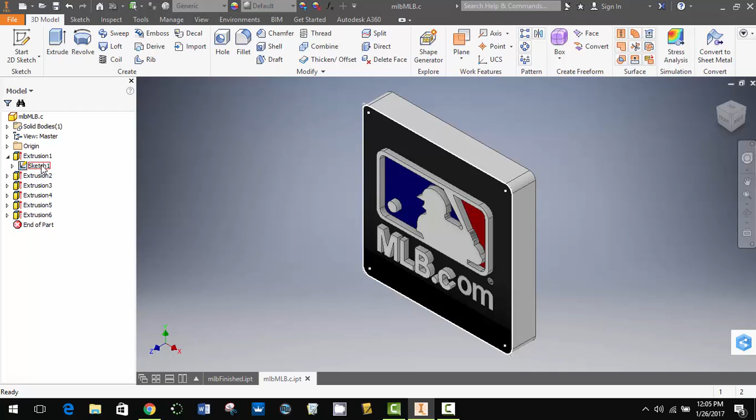I've got my finished product open right here, and I've got this one open too. I've extruded this area and a few of the letters. I wanted to take you back to this idea of having the 2D image on there. You can see that dark gray area with the red and blue right there—that's simply because this sketch is still visible. That very first thing I put down when we started this project was my picture, my 2D image, and I made it visible, then I'm going to take that visibility off.

So I right click on that first sketch that's hidden under extrusion 1, turn the visibility off, and we can see it's starting to really take shape. I'm going to turn it back on real quick because I still have to do those last 2 letters.

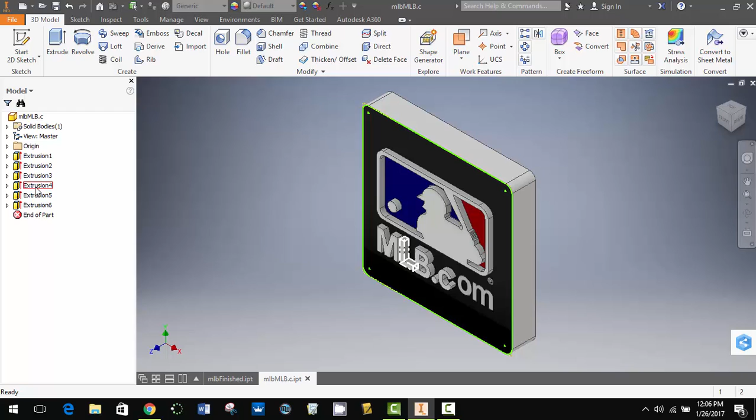I'm also going to show you what you can do with your extrusions. All my extrusions are going direction 2, so they're joins that pop up from the surface. If we look at it from the side, you can see them standing up. We can also make them cuts if we wanted to. If I double left click on extrusion 2, I can change it from something that builds on the surface to something that actually cuts into the surface.

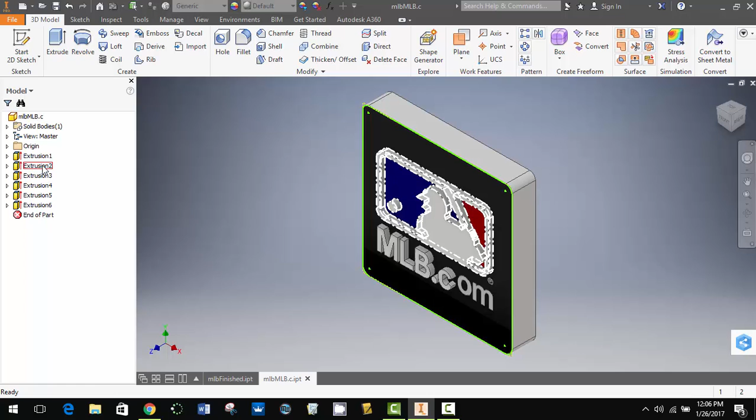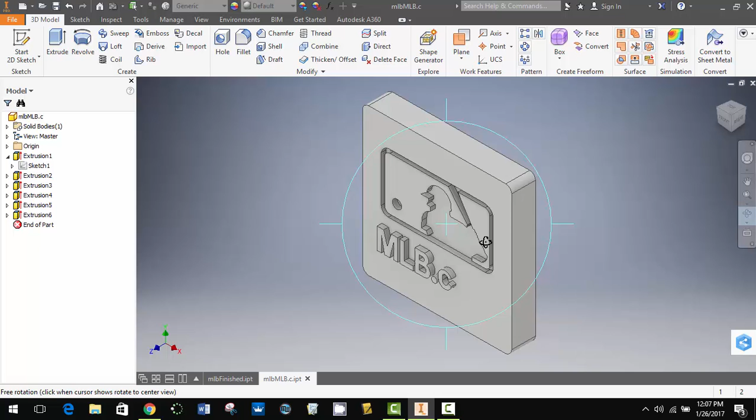So I'm going to double click on it and change it to a cut. I might have to switch the direction also. Let's see how that looks. I'll turn the visibility off on my sketch, and we can see that it now cuts into that block instead of building on top of it. I think that's an okay look—it would probably 3D print quite nicely.

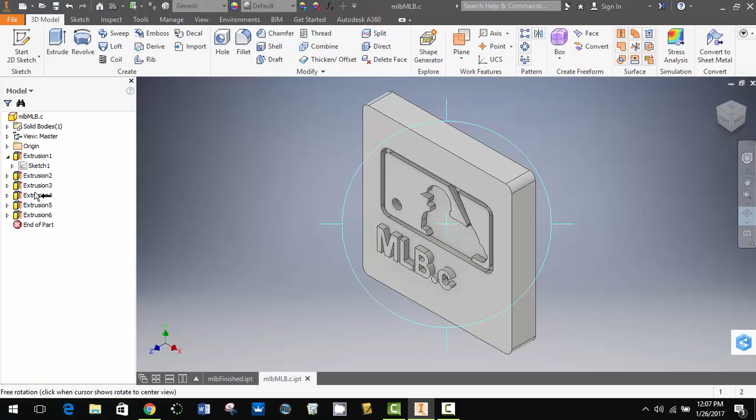Maybe I'll leave it like that for now, since I've already got one finished that does the opposite. I'll leave that one like that and see how we like it once we get to the end. So I'll click on my home button. I need to turn this visibility back on, so I right click, check visibility, and now I'm going to start a 2D sketch. Click on this flat surface right here.

I'm going to trace those last 2 letters. It might not be that exciting to watch me trace these, but I figured I should give you a little bit more of a tutorial on how to do that. I'm going to start off with the arc for this O and for the M over there.

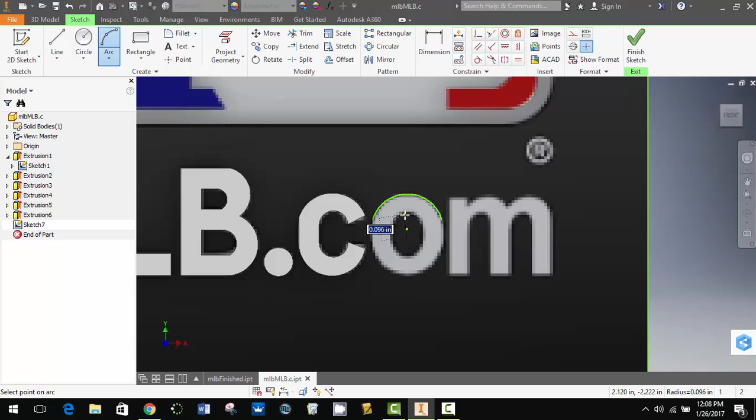I'm going to draw a line across here and bend it up, and that'll give me the top of the O. Then we'll do the inside of the O—just drawing a straight line using that arc tool, 2 left clicks, and zoom in a little bit. Get that line there, come down here and do the bottom. Left click, go across to the other side. I'm lining it up with the top, if you see that dotted line there.

I'm going to left click and stretch it out. Left click, do the middle one, line it up with my top one. Go straight across, line it up with the top one, and stretch it out.

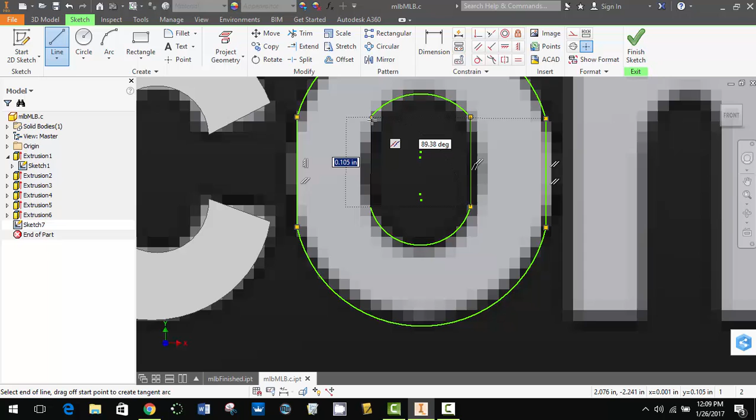Now I can connect those arcs with straight lines. Left click, come over here, left click—make sure you get the green dot, that's showing you it's connected, so hopefully we don't have to do a lot of cleanup. Hopefully it'll just extrude as soon as we're done. So there's my O—if I zoom out, it looks pretty good. Let's see if it works.

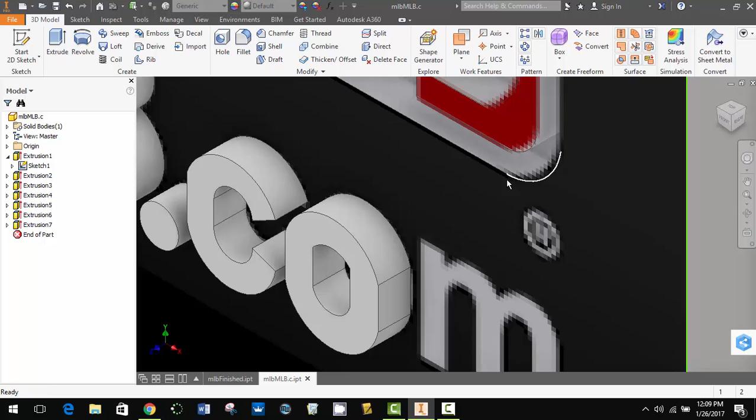Finish sketch, click on extrude, and zoom in pretty tight here. That is a lovely O. Use my wheel to zoom out, press down on it to use it as a button to move it around, and we'll do this M real quick because it's a little trickier. I just want to give you a few more tips.

So I just go straight across that curved area and click, come over here, click, click, drag it up, click, and I'm going to do the same thing with these. Just take it straight across, and hopefully drag it so it matches that shape pretty well.

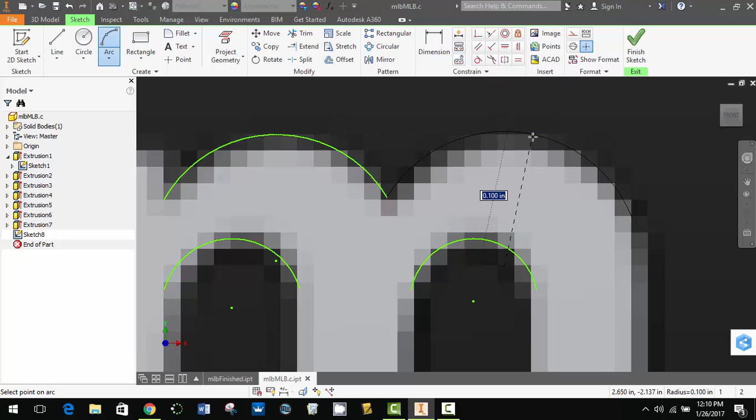I'll connect these last two—might put that one at a slight angle. See how that does? That looks pretty sharp. Connect everything with my straight lines, getting that green dot, take it up.

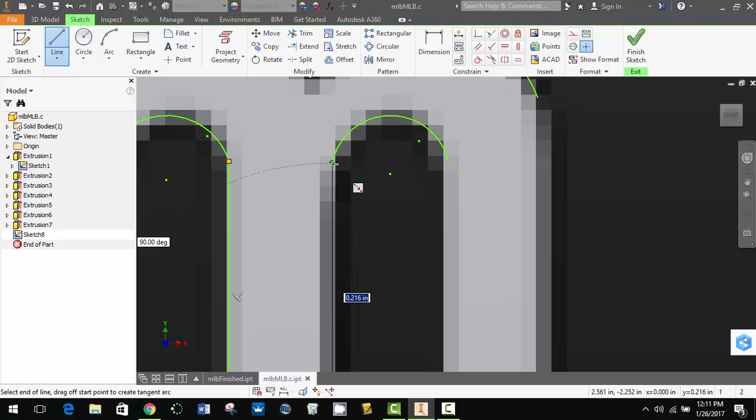Move it over, down, over, connect it to that arc—not the straightest line there, but that's okay. And we'll click on there, bring it down, over. It's just a lot of left clicking and making sure you're getting that green dot so your lines are connected, so you don't have to do a lot of troubleshooting at the end.

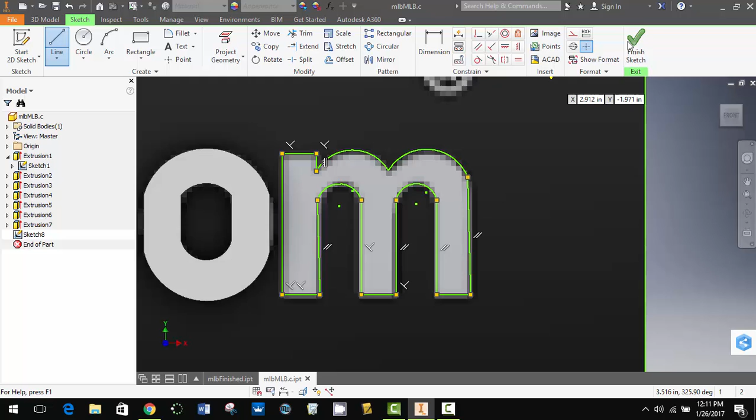The better you do connecting your lines when you draw it, the easier it's going to be to extrude it. So left click, drag it down, click, click, get that green dot, click. Let's make sure it extrudes. And there we go.

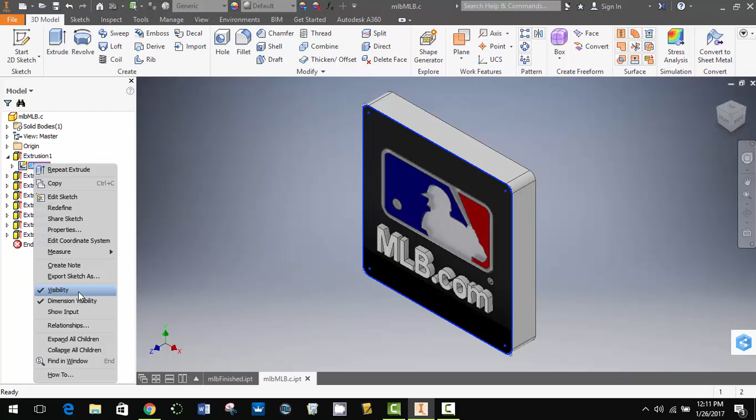That is basically my finished product. I'm going to turn the visibility of the sketch off. So again, I right click on sketch 1, left click on visibility, that goes away. I can then click on very specific things such as extrusion 8, which is the letter M, and I can change it to a random color.

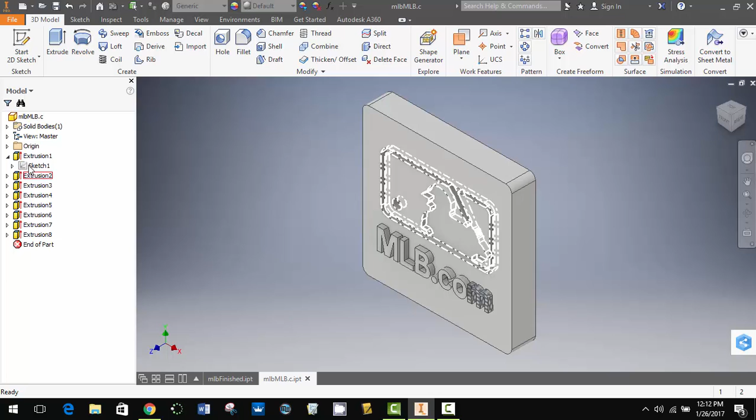That looks horrible, so we will change it to something else—Expanded Metal 01, that sounds lovely. Or instead of clicking over here in your browser menu, which is basically the history of the object, you can click directly on the object.

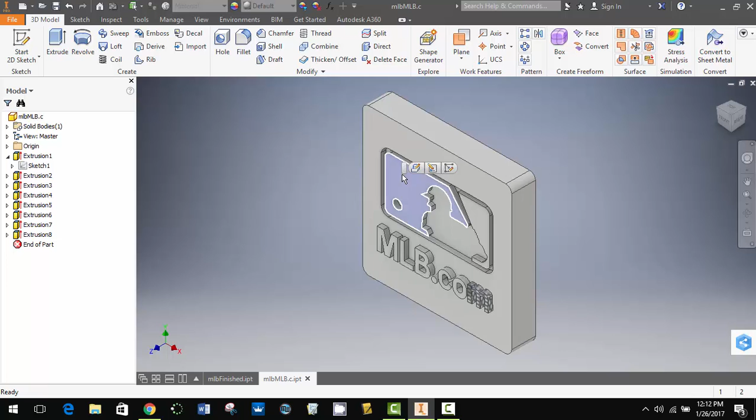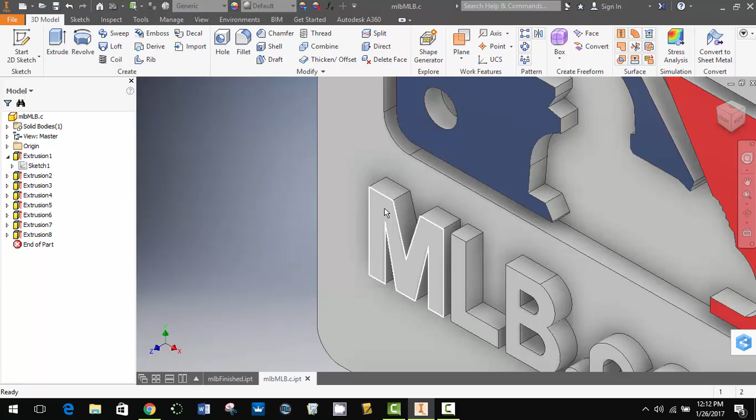So in the MLB logo, we've got a blue space here and a red space here. If I go to this finished one, I can click on that space and find a blue to apply to it. Then I could click on this one and find a red to apply to that. If you wanted to do multiple surfaces at a time, you hold down the control button and click on that face and that face and that face.

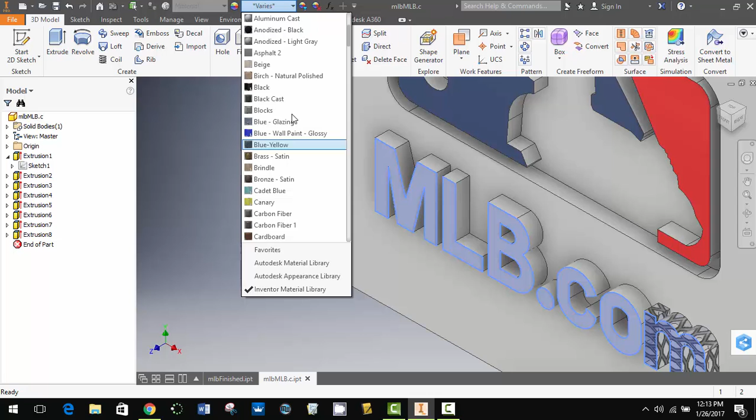I'm still holding control the whole time I'm doing this, using my wheel to zoom in and out. That face, still holding control—click on that, and then you can change multiple faces at one time. And there we go.

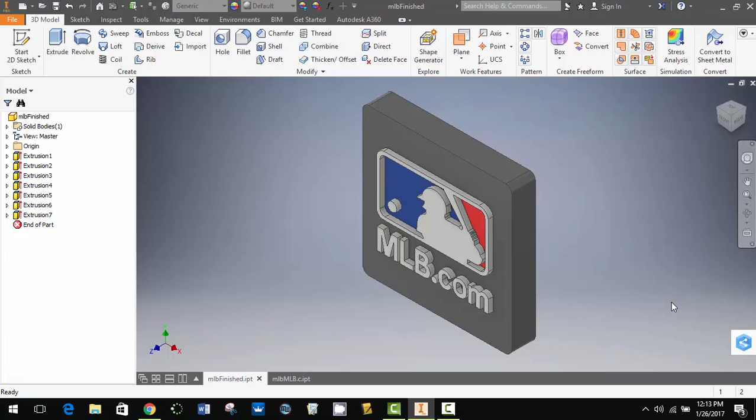Hopefully all these videos combined will help teach you how to turn a flat 2D image into a 3D object. That's my final product—I like how it looks. Hopefully you will create something that looks even better and is even more enjoyable to you. Thanks for listening. Good day.